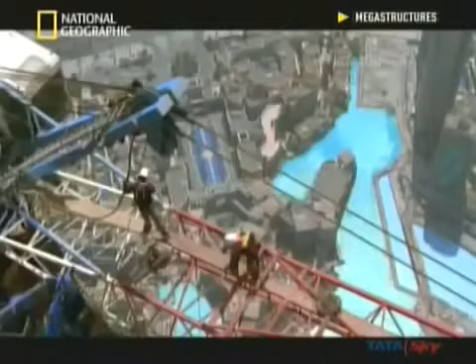The Burj Khalifa in Dubai is the tallest man-made feature on the face of the planet, and one of the greatest achievements in engineering history. To dream it up took outrageous ambition. To put it together requires nerves of steel.

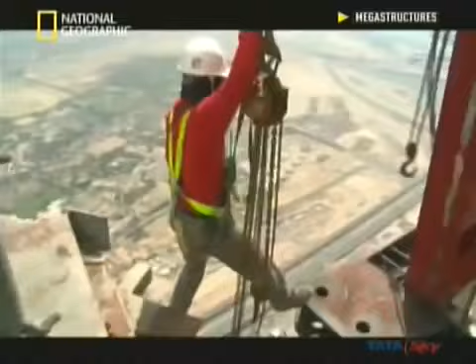Constructing cranes taller. Installing windows higher. Up! And building bigger than ever before. The immediate reaction was, "Are you crazy?" As the construction team makes history, they film it themselves. This is the story of one incredible skyscraper, and the people risking their reputations and their lives to build it. All these people that are underneath this are at risk.

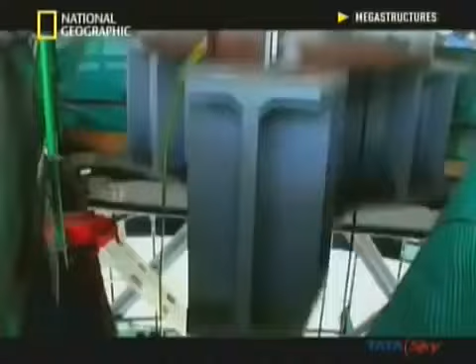In the Middle Eastern Emirate of Dubai stands an architectural giant. At 828 meters high, the Burj Khalifa is the tallest building on Earth. This $1.5 billion tower opened in 2010 with one of the most spectacular fireworks displays ever seen. But this patch of land once looked very different. 6 years earlier, when construction started, it was little more than a barren, parched, and sun-baked desert.

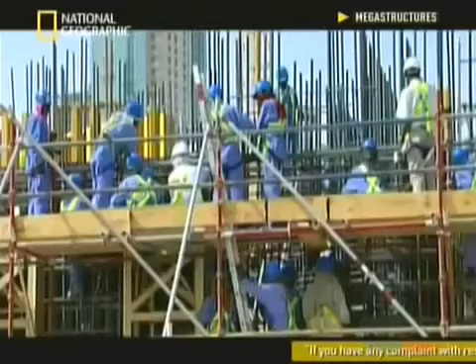In February 2004, the team breaks ground at the Burj site. When you build this big, speed is of the essence. Time is money. There's so much money invested in these buildings, you have to finish them and start recouping your investment. Construction manager David Bradford is the man responsible for getting the job done on time.

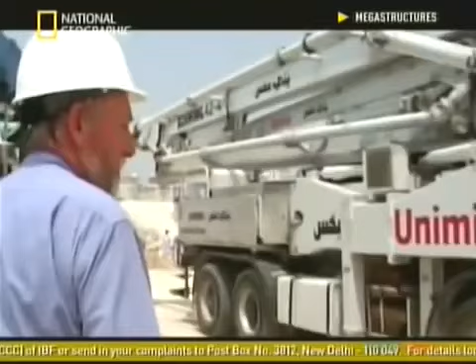So I was ecstatic, just to get a job like this. It's like a dream come true. This is the biggest building in the world. How many people get an opportunity to work on a job like this? But as David starts work, the architects are still finalizing the tower's complex design.

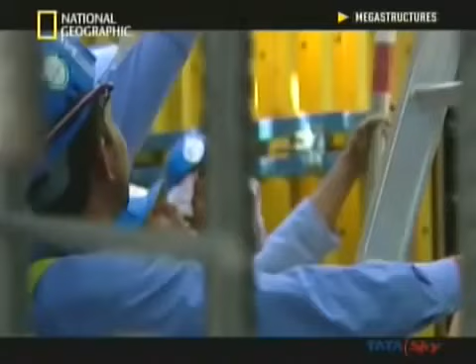The way you build a building like this, you have to fast-track it. So you can't wait until you get all the design in place. You'll be sitting there in your office for 3 years trying to get the design finished before you can tender it. With large parts of the structure still on the drawing board, the construction team heads into the sky.

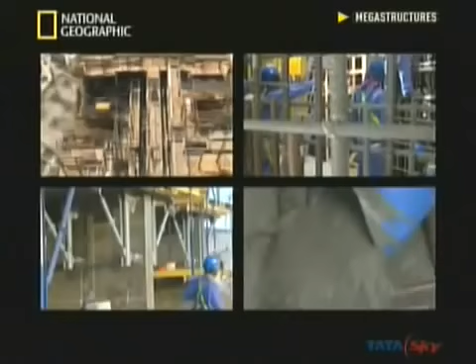The fastest way to build a tower like the Burj is with reinforced concrete, using a process called jump forming. The team builds molds at the base. They insert steel reinforcement bars and pour in concrete. Then when the concrete sets, the team lifts the molds up to the next level. And the process starts again. Using this system, the building begins growing at the pace of one new floor every week.

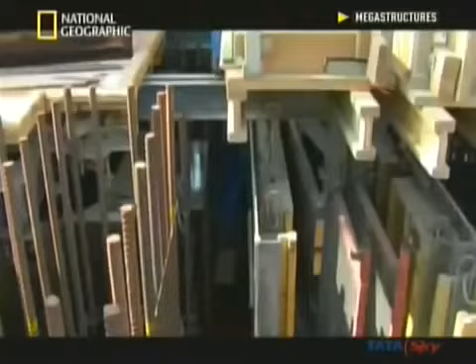When you set the jump form up like this, you put the rebar in, you pour the concrete in the top. 12 hours after you place the concrete, which is liquid, you pull the forms back and you actually climb the hydraulic jump form system up on the concrete that was previously poured. And then that climbs up automatically 4 meters at a time.

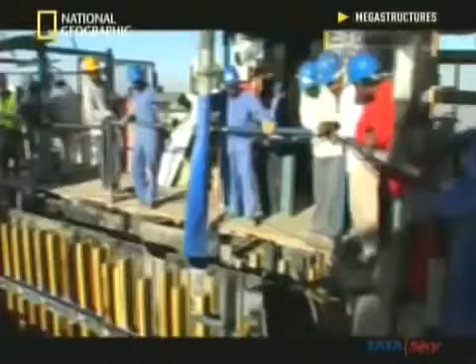The Burj Khalifa is the brainchild of Dubai property developer Emaar. They want to proclaim the city's growing status as a global financial center by building the world's tallest tower. So Emaar has called in one of America's top architecture firms, Skidmore, Owings and Merrill. SOM is based in Chicago, the home of the skyscraper.

As their chief engineer Bill Baker knows, building higher isn't simply a case of taking an old design and adding more floors. The added height creates a unique set of engineering challenges. We're on the 90th floor of the Willis Tower, formerly known as the Sears Tower. As you look out across the Chicago skyline, you see almost a sampler of skyscraper technology. Over here is the Aon Tower, which was formerly called the Standard Oil Building, and it's a single tube.

Each time architects go taller, they must invent new structural systems. If you look, the predecessor to the Sears Tower, the John Hancock Tower, it's called a braced tube. So you can see the diagonal bracing on each of the four sides ties all those columns together so that it acts as if it's one tube acting together. One of the last great structural inventions came with the tower that Bill is standing on.

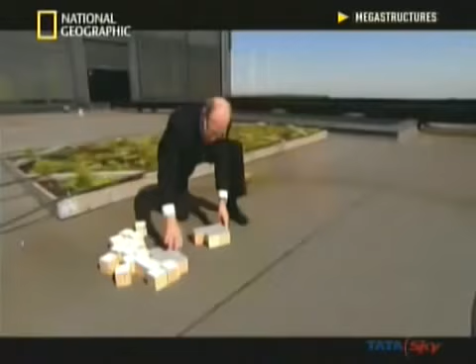At 442 meters, the Willis Tower was the world's tallest building until 1996. Its design is called a bundled tube. Essentially, it's made up of 9 towers bound together to create a single rigid structure. But this design has its limits. These 9 tubes are sufficient for a building of this height, at 442 meters, but what if you wanted to go taller? Say you wanted to go up to over 700 meters.

Well, you've got to make the footprint bigger. But as we do this, we've gone from something that was 3 wide to something that's 5 wide. So you have a huge amount of area, which is difficult to market. And what's more important is that the space becomes very, very deep. In buildings, you want to have views. You want to be able to see out the window. And you can see your occupants would be so far from the views from the skin as to render the building unusable.

To create a taller tower with bright internal spaces, Bill and his team devise a new structural system. The structural system we use for the Burj Khalifa is the buttressed core. Now the core is the center hexagon in the middle of the building, and that's what's used to resist the twisting forces on the building, okay? But it's much too slender to go to such great heights. So it needs to be buttressed.

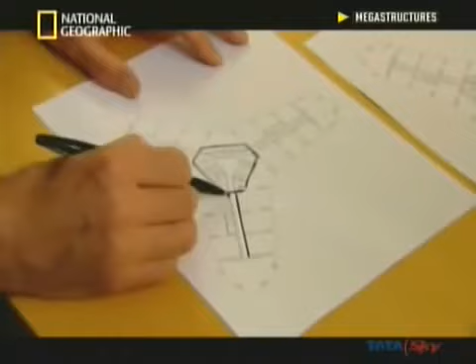Now the buttresses are the 3 wings that come off. It's consisting of these walls that go down the corridors. So you can see how this core has been buttressed in 3 directions. That's why the structure going on the wings. To my knowledge, it's never been done anywhere else. And so it's a unique solution to a very interesting problem.

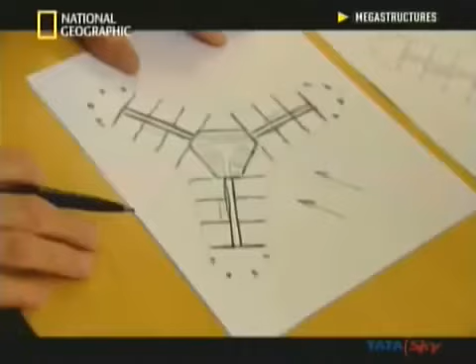With the buttressed core concept, natural light floods the interior. We've come up with a solution which allows us to go very, very tall, but it's light and airy on the inside. It's as if you're in a 10-story building rather than a 160-story building. In SOM's design, the large tower base helps support the huge weight of steel and concrete. Then, as the building climbs, the buttresses step back in a rising spiral.

The team then coats the design in glistening mirrored glass to reflect the desert heat and light. If you were to compare the Burj to an automobile, you'd be talking about Lamborghinis or Ferraris. It's all about performance, and this building is at the highest level of performance.

This quality comes at a price. The building cost was a closely guarded secret. We heard some general figures that were thrown out. We guessed that it was somewhere in the $1.5 billion range, but we weren't privy to a lot of that information. And again, I think the jury's still out. Making this billion-dollar design a reality will be a mammoth task.

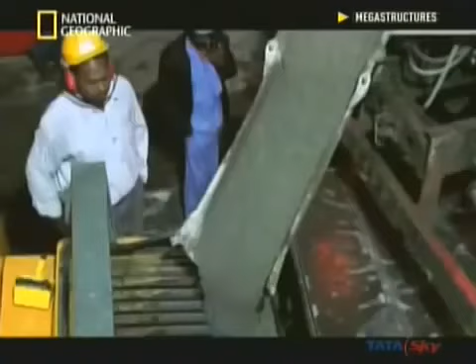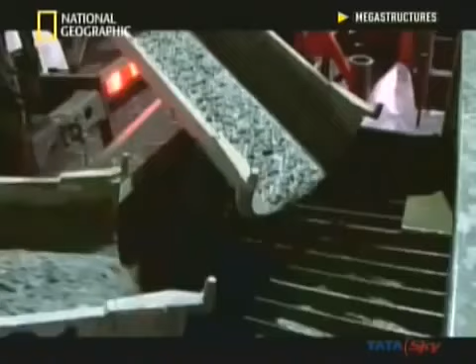The most basic construction materials must be super-powered. Strength of concrete was key here, absolutely key. And we produced concrete here that nobody produced anywhere else. The team uses over 25 separate ingredients to create concrete that stays liquid as it's pumped up the building and then turns solid extremely fast.

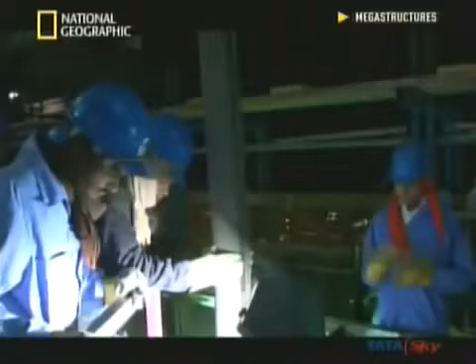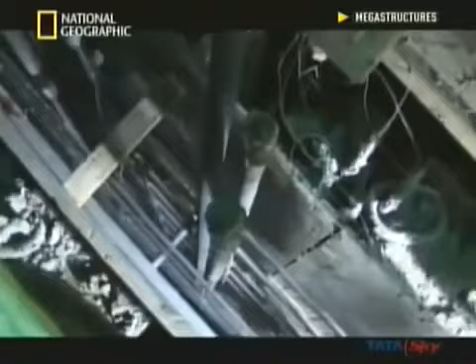But getting this special mix to set is a massive challenge in Dubai, with temperatures rising over 45 degrees Celsius. If the concrete is too hot, it'll set instantaneously and you can't even place it. You have to pour at night when the temperatures are lower, and you have to put in ice and chilled water in the concrete mix.

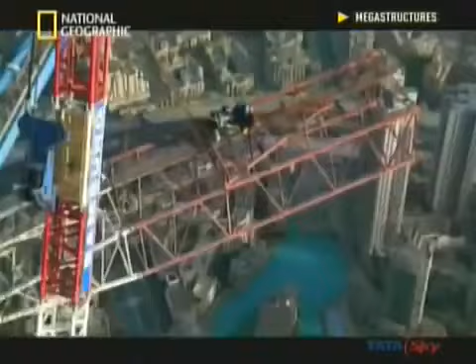To lift this mix up the building, the construction team uses 3 of the world's most powerful concrete pumps. Over 32 months, the pumps deliver 165,000 cubic meters of concrete, enough to lay a sidewalk 880 kilometers long. The team will then top the concrete tower with structural steel. And as this building rockets out of the desert, men and machinery will go to greater heights than ever seen before. Okay, over the edge.

The city of Dubai is home to 17 of the 100 highest skyscrapers on Earth. But they're about to be dwarfed by a monster. As construction accelerates, the Burj Khalifa is now growing a new floor every 3 days. The idea is keep the ball rolling, never stop construction at any point in the project until you're finished. The building's handed over, that's it. That's when you can relax.

While this process continues, there is still one fundamental detail to resolve. The architects still haven't decided on the building's final height. Usually minor things change, and this one, major things changed. The foundations went in way before we figured out the final height of this building. It's an issue that has to be cleared up, fast.

The landmark to beat is the 508-meter tall Taipei 101 in Taiwan. SOM's original design is just 10 meters higher. And one of the reasons why we did that is we didn't want to promise more than we knew we could deliver. But the architects soon calculate that the structure is so strong, it could stand over 300 meters taller.

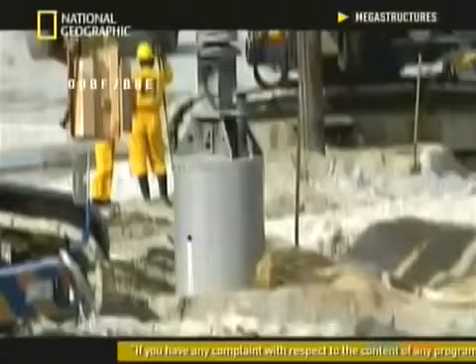When complete, the Burj will stand 828 meters above the ground. The question is, are the foundations strong enough to hold it up? Early on in construction, analysis of the ground under the site highlighted a problem. It's not like when I worked in New York City, you get good granite there, you go down 4 or 5 meters, you're into good granite, and that's what you sit your foundation on, the granite itself. Here the ground is, top layer is sand, 3 or 4 meters of sand, and you get into weak sandstones, weak limestones, nothing very good.

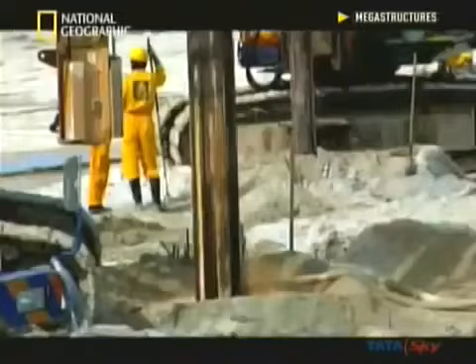But science provides the answer. The future of the Burj Khalifa and its entire colossal weight rests on one scientific principle: friction. There's basically 2 methods in piling. One is end-bearing piles, which is you put the pile directly on the hard rock. That's what can sustain the load. But here we went with skin friction piles, where the weight of the tower is carried on the friction of the pile, the side of the pile. The foundations of the Burj rely on the super strong grip created between the ground and the sides of each pile.

Beneath the tower, the team has driven 192 piles to a depth of 50 meters to support a 3.7 meter thick raft of solid concrete. These foundations must hold up a building that weighs over 500,000 tons. The numbers are so big that the team has to allow for a small degree of settling in the design. Once we evaluate all the total load of the building, live and dead loads, we expect the foundations to settle about 75 millimeters. But the foundations should hold.

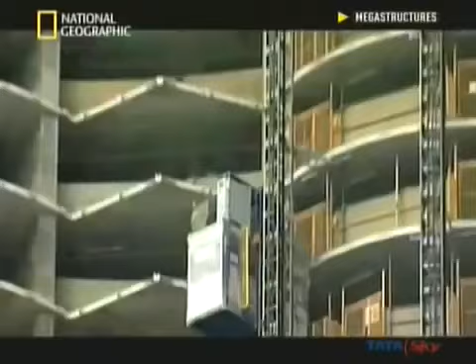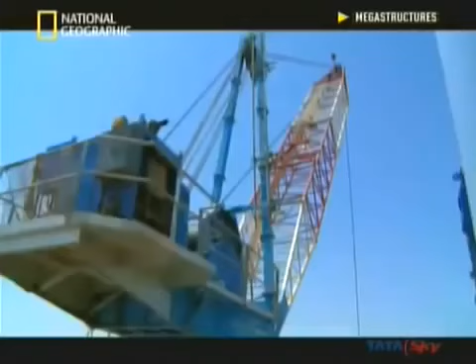3 years after breaking ground, construction reaches 512 meters and 141 floors. The Burj is now the tallest building on Earth. To help move materials, the team hires 3 of the biggest construction cranes in the world. I mean, these are very specialist cranes, actually huge. They weigh 120 tons dead weight. That's the crane itself, without anything on the hook.

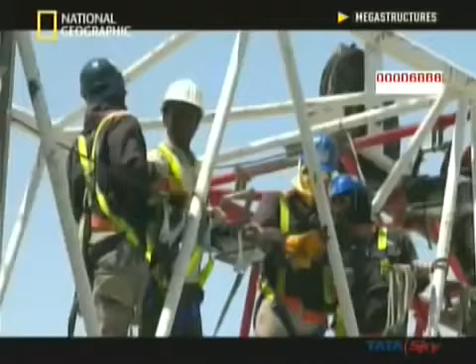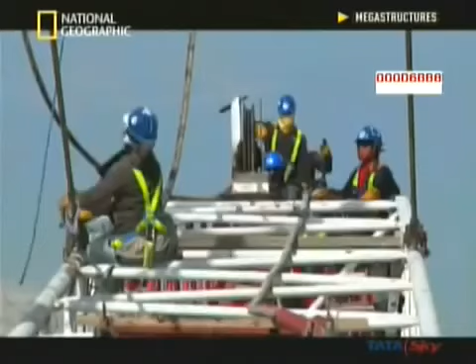The high-wire act of installing the cranes falls to a special group of men. Sharif and his team of crane riggers. These men come from every part of the globe, and many speak different languages. But they have 2 things in common: a strong nerve and an incredible head for heights. Their task is to erect the cranes and keep them working smoothly. All without a single slip. They never ever lost sight of the ground and the edge of the building, and it was amazing that these people were so comfortable.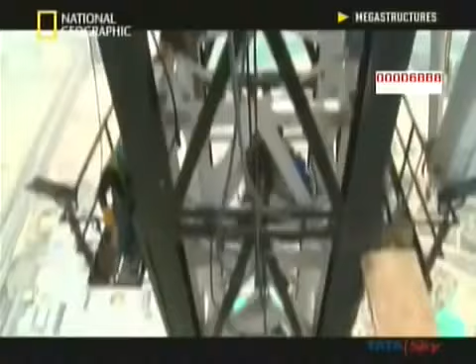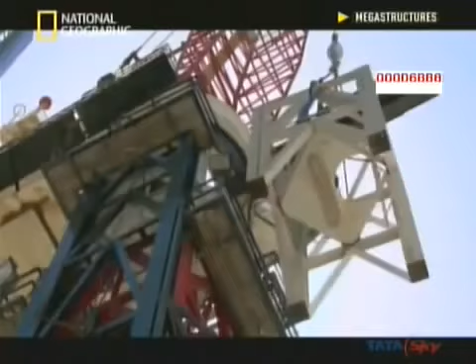The cranes contain an ingenious self-jacking mechanism, so they can grow alongside the rising building. As every new floor is completed, Sharif and his team add another section to the tower support and lift each crane even higher.

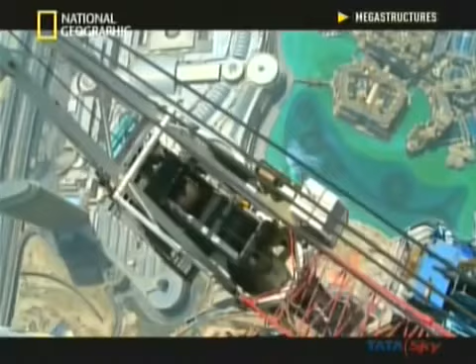You need a steady hand to operate the highest construction crane in the world. And one of the few trusted with the task is Mohammed from Pakistan. I'm on duty for 12 hours, from 7 in the morning until 7 in the evening. There was a myth going around that the crane operator lived in the cabin, but I think the cabins are too cramped and uncomfortable. At 700 meters up in the air, Mohammed's crane cab is nearly twice as high as the Empire State Building. I like heights. They're great for work. If I need to go higher, that's fine. Whatever the height is, God willing, I'll do it.

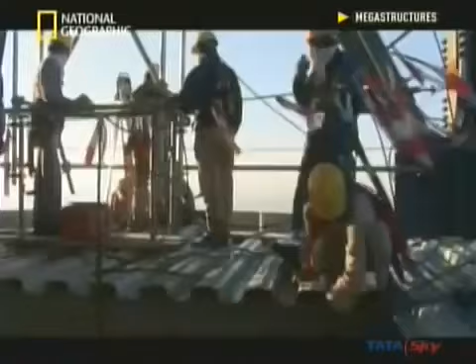As the Burj reaches for the sky, it is entering the unknown. And one powerful force is becoming an increasing threat. The first overarching thing is you have to be respectful of the laws of nature, with gravity, wind, and the sun. And on a super high rise, the most dangerous and unpredictable of these elements is wind. When you get to these heights, the dominant load is actually wind load. It's not dead load, which is the weight of the structure and the cladding and so forth. It's not live load, which is the people in the building. That's fairly small. It's actually wind load. You get the wind blowing on the side of the tower, and of course it tends to bend the tower or try to push it over.

No building demonstrates this problem better than the John Hancock Tower in Boston. A masterpiece of steel and glass, 240 meters tall, the Hancock was constructed in the 1970s. But serious problems soon emerged. Even in moderate winds, people inside suffered motion sickness as the building swayed. And over 5,000 glass panels blew out, shattering on the sidewalk below. Only a major redesign saved the tower from demolition.

To prevent the Burj from suffering a similar fate, the team tests the building in a wind tunnel. Peter Irwin is one of the world's top wind engineers. These are various models of different buildings that we've tested in the past. This one here shows some of the unusual shapes that architects are coming up with. That one's being built in China.

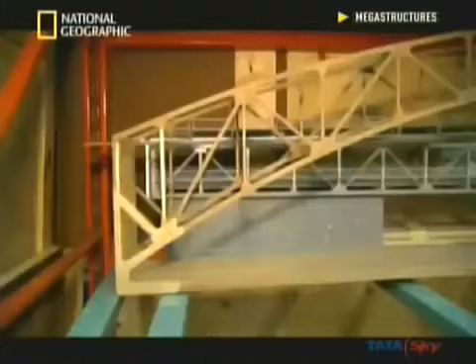When we get involved with a wind engineering project, there are 2 aspects that we need to address. First of all, we need to know what are the winds doing in the area that the building is going to be built. Then we also need to know what is it going to do to the building. Peter and the team calculate that the Burj has to withstand gusts of up to 240 kilometers per hour.

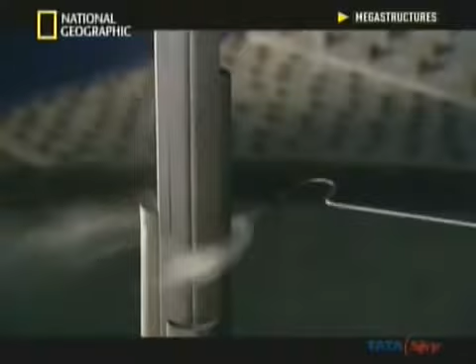But because of its height, this tower faces an added danger. Buildings, as they get taller and more slender, run into a particular phenomenon in wind called vortex shedding. This is a model of a tall building, and the wind is blowing this way. And what happens with a building like this is that you get vortices peeling off this front corner, first off one side and then off the other side. As these whirlwinds peel off each side of a skyscraper, they can pull the building violently from side to side. Peter and the team must make sure that this phenomenon doesn't damage the Burj.

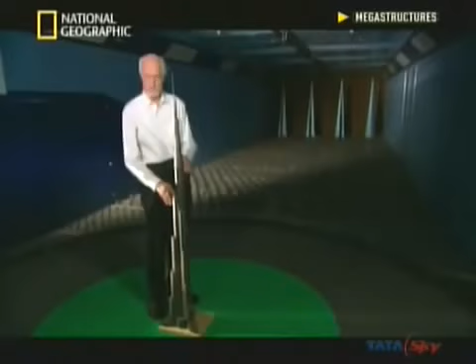There were 3 aerodynamic improvements that were developed as a result of the wind tunnel test. One of them was to improve the shape of these outer buttresses by softening the corner here. Another one was to reduce the width of the tower higher up. And a third improvement was achieved by reorienting the entire tower relative to the prevailing wind directions.

The end result is an incredibly stable building, with a shape that resists vortex shedding. So you might say that this shape confuses the wind and it's unable to create these strong crosswind forces that affect many other buildings. The Burj is equipped to handle the strongest winds that strike Dubai. On site, the superstructure is shooting upwards.

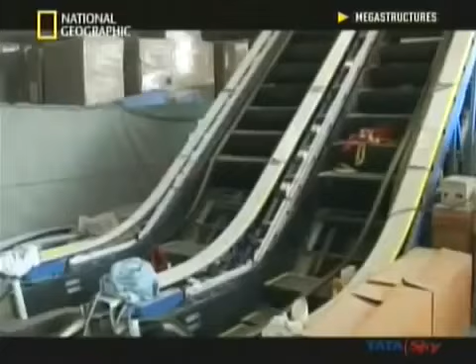Once completed, the Burj Khalifa will contain 900 apartments, a 160-room hotel, and 37 floors of offices. The building will use up to 36 megawatts of electricity, enough to power a town of 20,000 people. In a power outage, 5 huge generators will supply backup electricity. But first, someone has to get these massive machines into position.

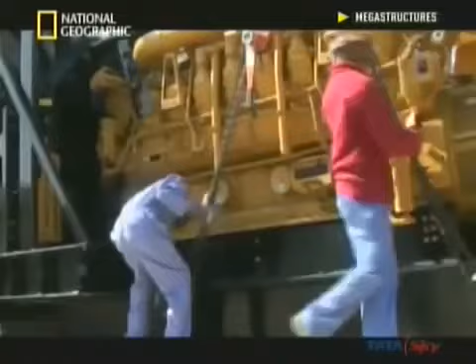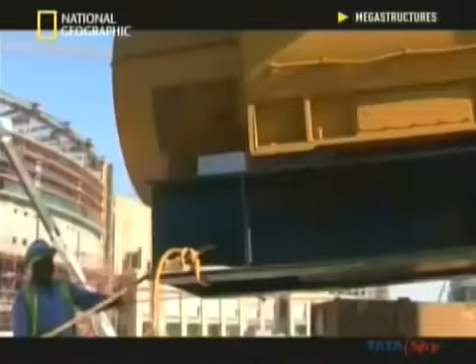3 days before Christmas Day, and look what Santa's brought me. That's a 22-ton generator, and there's 5 of them. Pull it. Gently. Keep your eyes on the machine. What have we got? 26. It's supposed to be 22. Someone, somewhere, has made a critical mistake. Each generator should weigh 22 tons. Why is it 26 tons?

You're amazing. Amazing. Everything is rated below 25 tons. The spreader beam is rated until 25 tons. All these slings, they're 6 tons each, that's 24 tons, and we're trying to lift 26 tons. Therefore, all these people that are underneath this are at risk. Right now, my people are at risk. It's 26 tons. The generator is 4 tons too heavy, and the chains could snap at any moment.

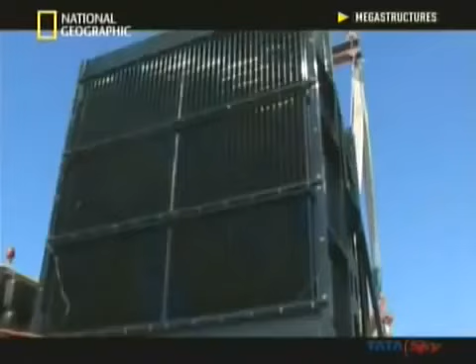Put it down. These things are not an exact science. It's experience, and I'd sooner not risk the lives of men or machines. When you're building on this scale, safety is paramount. The team must reinforce the lifting gear before moving the generators into the building. You go downside, huh?

As work progresses, the task of keeping everything on schedule is taking its toll on David Bradford. I went all out here to produce the best job possible. That had an impact, obviously, on my family life. My wife didn't see me, although she didn't complain about it, but I'd show up home and my wife had already gone to bed, and I'd be out in the morning before she got up. But the job's just about to get even tougher.

It's kind of a building you can't afford to make mistakes. Okay. That's the bottom line. You make a mistake, the building stops, then everybody incurs huge costs. The contractor's got all his plant and equipment lying idle. He's got thousands of workmen out of work, basically. Can't afford mistakes. You have to check, double check. Everything has to be more or less perfect, all the way up the building.

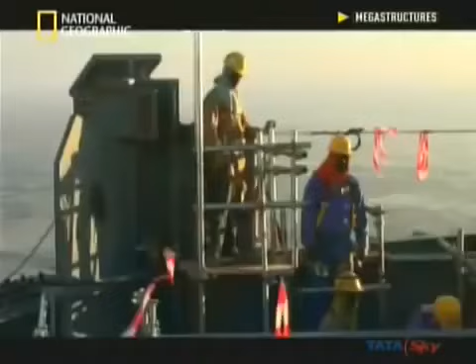And with the superstructure almost done, one thing is less than perfect. The glass panels that should already cover most of the building are still nowhere in sight.

As the finished shape of the Burj Khalifa begins to emerge from Dubai's desert haze, the team urgently needs to start cladding the building in its steel and glass facade. As the construction drives upward, you need the cladding to enclose the building, create an interior environment where you can actually work inside and do fit out and mechanical work. All the kinds of things that make the building habitable need an enclosure. It is a massive task to seal the structure from wind, rain and sand.

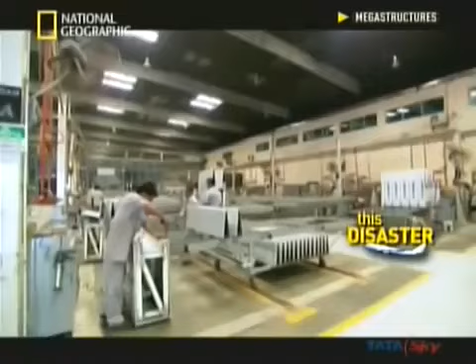24,348 individual panels must be assembled and installed on the exterior. But the company commissioned to supply the panels has gone bust. Now the building is in danger of going over schedule and over budget. Every idle day, every decision that is not made, costs somebody a lot of money. Local contractor Arabian Aluminium brings a new panel supplier on board. And they track down a problem solver to kick-start the operation.

I hopped on a plane, arrived in Dubai for the interview and was taken to the job site. And he said, well, this is the job and this is what you're going to be doing. And I looked up and I said, wow. He goes, yeah, it's not even halfway there. So big surprise. And I said, well, where's the windows? He said, well, this is a problem. There is no curtain walling. There's no design. We don't have a system. I said, well, this is a job for me then. I can fix this problem.

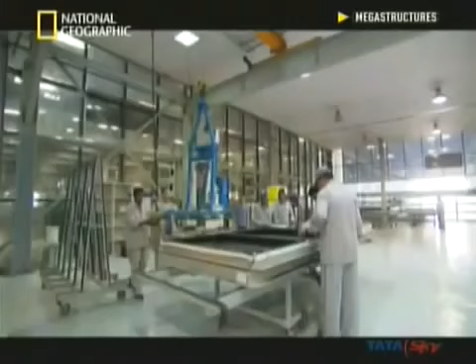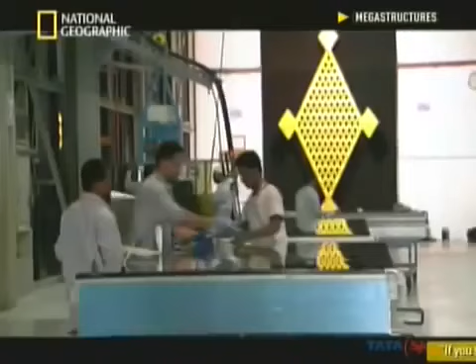Construction of the facade is now 18 months behind schedule. To put the build back on track, John Zarafa helped set up a brand new factory devoted entirely to the Burj. I thought, yeah, it's going to be difficult, but it's a challenge. We were fairly amazed because they went from appointment of their new contract through design, through production of the components and ready for the testing in a space of 4 months.

This is a typical panel that was used on the Burj, basically with a vision glass, big piece of vision, small vision glass, stainless steel spandrel, vertical bullnose. It's a stainless steel fin, it's mirror finish, which at the moment has got protection on it, which will eventually get taken off. These panels are literally lifted up as a complete unit and they're hung. That's why they call it a curtain wall. It's actually hanging from the slab above.

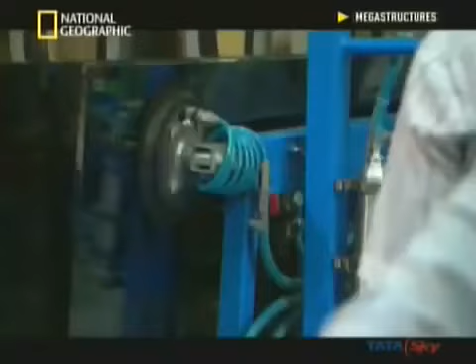Covering buildings in glass might look good, but in Dubai, this creates a special challenge, as John demonstrates. We've got a piece of clear glass here, just normal glass. The sensors are measuring the temperature in the box to understand how much heat is transferring through the glass and into the box. So if this was on the building, this is the amount of heat that would transfer through the glass and into the building. The outside temperature is now reading 46 degrees Celsius, which is very, very hot. As you can see, we're having a bit of a sweat.

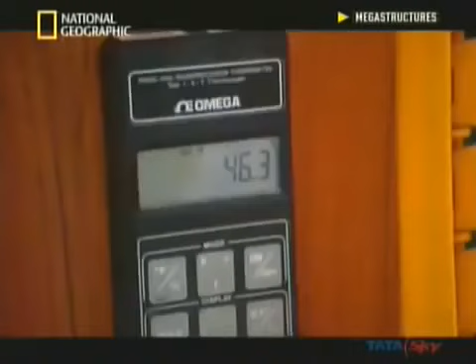46 degrees Celsius is high, but that's nothing compared to the temperature under the glass. The current temperature inside the clear glass box is reading 98 degrees Celsius, so not too many human beings that I know could actually live in this environment. The internal temperature is just below boiling point. If this ordinary glass were installed in the Burj, the building's interior could become the world's biggest sauna. But the team has a high-tech solution.

Here we've got the glass for the Burj Khalifa, which has 2 coatings on it. The outside coating is a silver coating, which captures the UV rays and reflects them back out of the building. The inside coating is a titanium coating, which captures the infrared rays. By reflecting infrared and UV rays, the glass drastically reduces the amount of heat that penetrates the building.

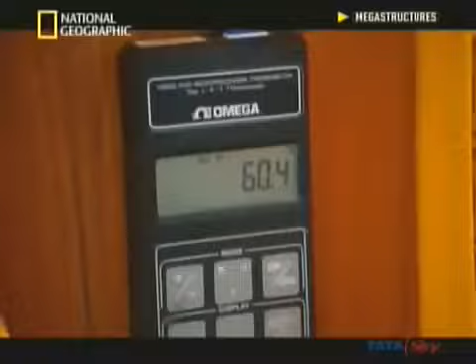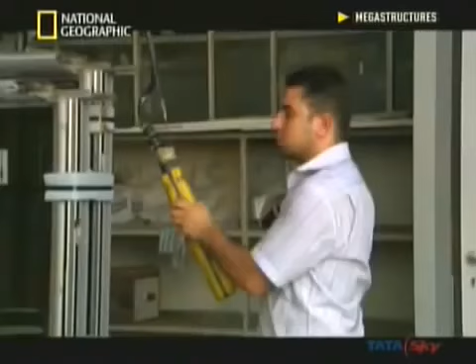But this technology comes at a cost. With everything that is involved with making a panel, to the point of bringing it to the site and installing it, you're probably talking close to $2,000 US a panel, times 24,000 panels, it's a lot of money. So 24,000 times 2,000 is 48 million. As the glass and aluminium arrive in Dubai, factory workers assemble the panels and ship them straight to the building site.

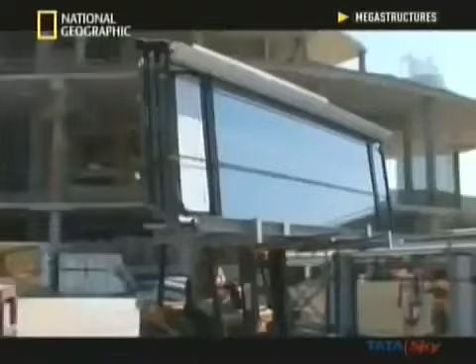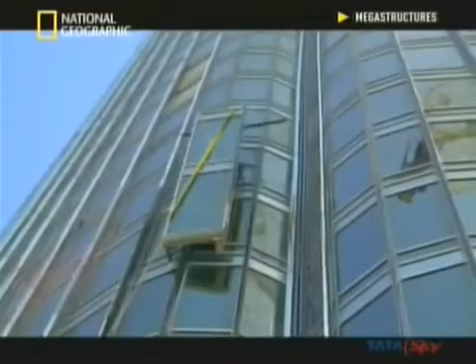The panels are up to 6.4 meters long and weigh up to 750 kilograms. And every single one must be lifted individually and installed by hand. It's very dangerous. You can imagine these panels are quite large, and as soon as the wind grabs them, they're like a big sail, so very difficult to control. The panel could go flying back into the building, the glass would break, and you're going to get a shower of glass coming down the building. A guy could get his legs cut open and stuff like that. It's quite dangerous.

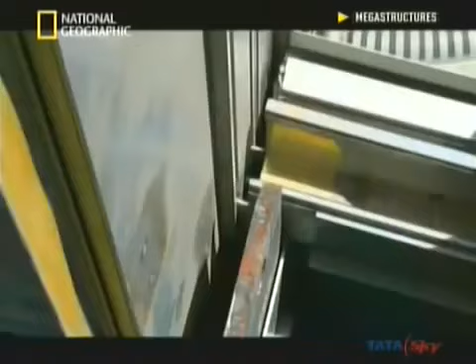As the workmen seal the building, no one is following progress closer than construction manager David Bradford. The major milestone, believe me, I've been working on this thing for a year now. It's been a nightmare. On a Friday, if I wasn't coming into work, I'd set my telescope up on the roof and spy on the cladding contractor and make sure he was working. If he wasn't, I'd give him a telephone call. Yeah, hey, what happened? You know, why aren't you working?

We actually recovered all the time that we needed to get the building back on track, which was really astounding that they were able to do this. The curtain wall is virtually finished. 5 years after breaking ground, the Burj is racing towards completion.

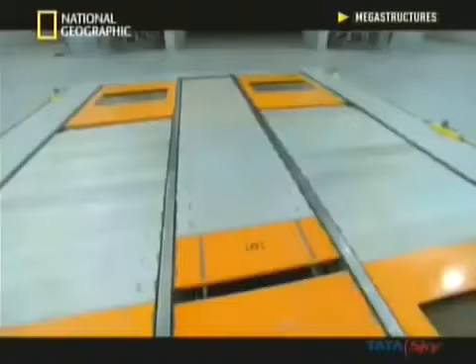On the outside of the building, one of its signature features is taking shape. The highest external balconies in the world. It was a client suggestion, and my first thought was, you better bolt down the furniture. We'll head into the main control room. Wind engineer Peter Irwin has a simple way of demonstrating the problem. Using a state-of-the-art wind tunnel at the University of Western Ontario, run by engineer John Comar.

The air is streaming through this side. It contracts right through this nozzle in a very uniform fashion and streams right into that corner number 1. Okay. What we want to do today is to look at the effect of wind on people. We will presumably be able to have them harnessed down to be safe. We'll certainly strap them down and get them linked to the floor so they don't blow away.

In Dubai, the Burj Khalifa might be hit by winds gusting up to 240 kilometers per hour. And this demonstration will show the effect of high winds if an ordinary person was standing on an unprotected balcony. Okay, we're turning on the wind, Simon. It's going to go up to 70 miles an hour, so get ready. Okay. In case you run into trouble.

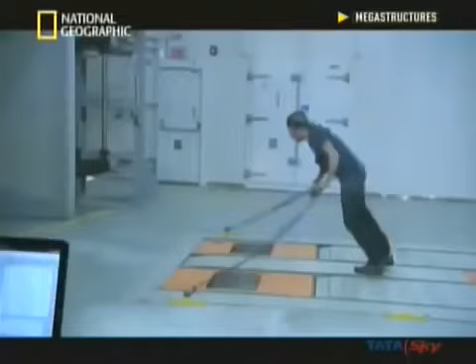130 kilometers per hour is equivalent to a Category 1 hurricane. Could you try and take 1 or 2 steps forward? Okay, thank you. That's enough. What would it be like to be on a balcony in that kind of wind at 120 stories? To prevent people being blown off the Burj Khalifa, the architects developed ways to protect balcony users from the wind.

We came up with these glazed balustrades which keep the wind from blowing straight through across the balcony terraces. We came up with these architectural dividers which keep the wind from coming over the balustrades and sweeping across the surface of the terraces. And we created these trellises which stop the downdrafts from pushing down over the tops of each terrace. But inside is the most ingenious solution.

Well, we have wind alarms installed on every facade where there's a terrace. So if the wind speed on the terrace exceeds what we consider to be safe for the occupants, there will be an alarm that goes off to warn people not to use the terrace at that particular moment.

Meanwhile, further up, the building has yet to reach its final height. The construction team must crown the structure with one of the most extraordinary pieces of engineering ever attempted. A 136-meter tall steel pipe, weighing over 350 tons and measuring just 1.2 meters across at the very top.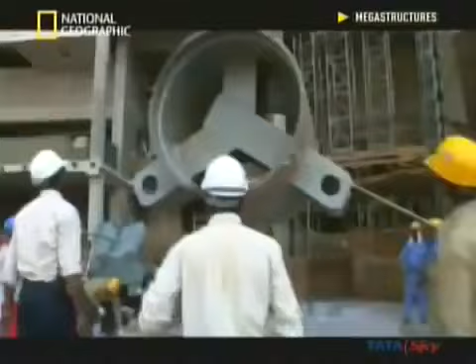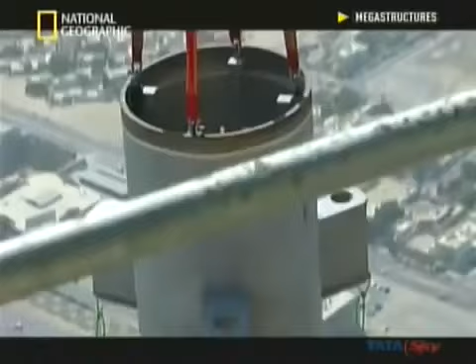The thing is that we couldn't get the crane high enough up to set the spire. Even with the crane at maximum boom height, it couldn't get anywhere near the top of the spire. No crane in the world can handle this job, and no helicopter can lift 350 tons of steel. It seems the spire is too big, and its destination too high. But then, an engineer suggests an ingenious solution. Lift the spire in pieces and assemble it inside the building.

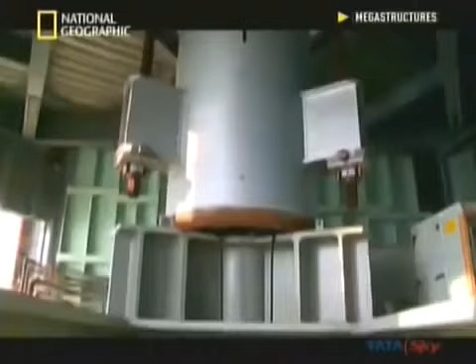The spire was basically constructed inside the shaft of the building, and then using strand jacks, it was then jacked out of the building. All the lead architects and engineers gather to see the spire rise into its final position. Here we are for the last jacking of the spire to take it up to the top.

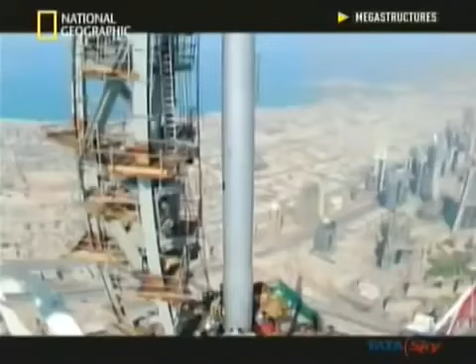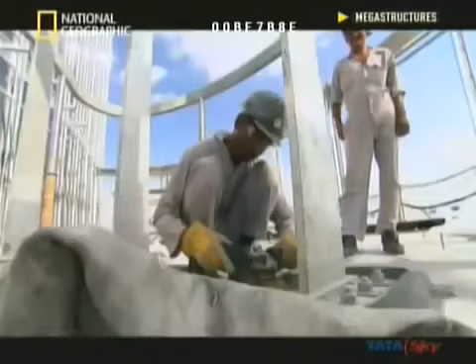It's a pretty nice moment to see this happen. For the first time, the silhouette of the Burj is complete. The team can now start to apply the finishing touches. This building doesn't just have to be the tallest in the world, it also has to be the best. And to make sure it's just that, some brave men are about to go to extraordinary heights.

It's a long way down here. Yes, sir. Long, long way down.

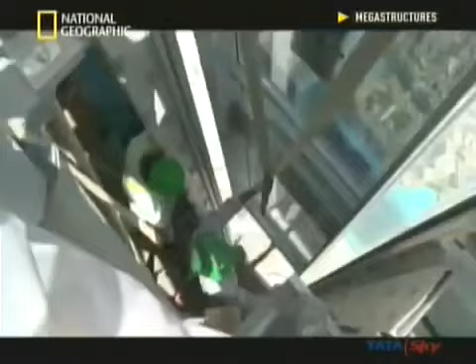After an incredible team effort, workers are finally installing the last curtain wall panel on the Burj Khalifa. The key to the job was the planning. We planned that whole thing down to the millimeter, down to the second.

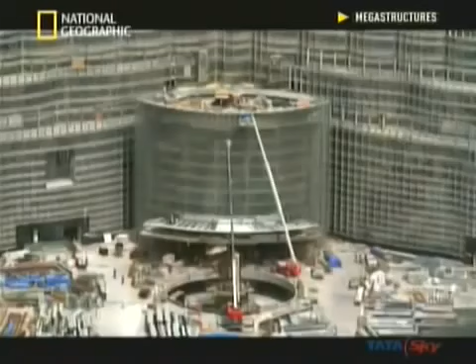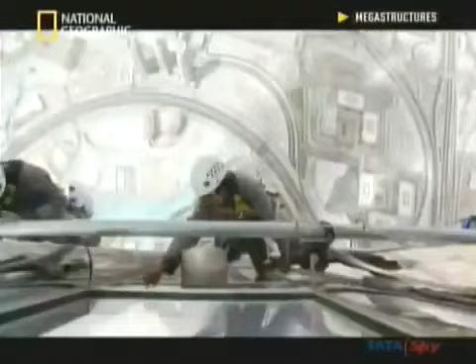The race is now on to finish the building before it opens in 3 months. After 6 years of construction, it's covered in dirt and dust. But there's a simple solution. Teams of window cleaners will polish the entire facade by hand and rope. All 24,348 panels.

800 meters up, there's one more job. After dark, the entire building will be illuminated by thousands of decorative lights. But at the tip of the spire, the last 7 lights still need to be installed. The scope of work was to cut 7 holes into the existing spire.

If it was me, I probably would have said, out of 2,000 lights, 7, forget about it. Standing on the ground, you're not going to notice. But Emaar wanted to do this job 100%. You know, they set their targets very high. The construction team must find a way to finish the job. You couldn't get a scaffold up there. The crane couldn't get that high.

Rope access expert Mick Flaherty has the answer. The immediate reaction was, are you crazy? How do you intend on doing this by hanging on a rope? Mick recruits a highly trained supervisor to lead the job. Now this is an abseiler. This is a guy that's worked in the rope access industry for many years.

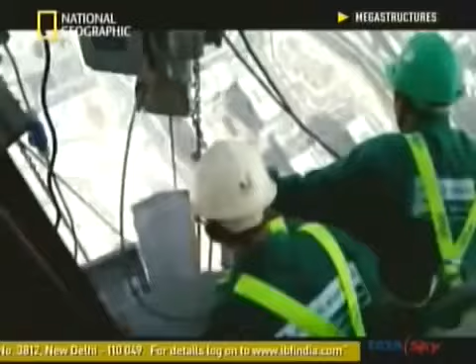But just before they're due to start, disaster strikes. At this height, it does something to you. You're totally out of your limits. Making our way into the spire, I could see it in his eyes. He was concerned. He went white. He stops and he says, I'm sorry. I says, what's wrong? He says, I don't want to put my own life at risk. I can't do this job.

With no time left to find a replacement, there's only one solution. Mick has to lead the job himself. It's a highly dangerous task, in some of the toughest conditions imaginable. For me, it was the heat. It was the environment here in Dubai. It was a heavy construction job in an extreme environment. It's too dangerous and inaccessible for a TV crew. But Mick films it himself.

He's going to get into position now. Then, Mick has to seal the lights in place from the outside. We got to the top of the spire and I rigged the job up and threw the rope, looking to make sure I had knots on the end of them. This one's a serious one. Yeah. Okay? Very serious. You're all ready now? All ready, sir. Okay, over the edge. It's a long way down here. Yes, sir. A long, long way down.

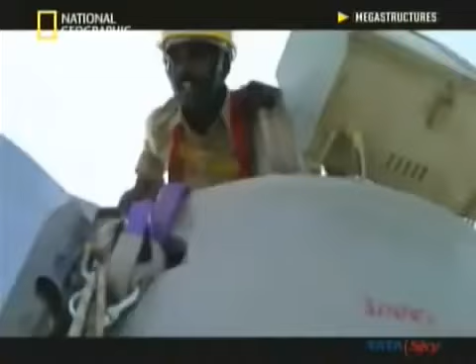You feel so high, you know? It doesn't feel real. Okay, Jamil? Yes, sir. All okay, sir. All right. Keep it there. That initial going over the side and doing the abseil, it was just a mega buzz. It was like, shall I look down or not? We've been cutting the hole with the steel. We've then been installing the light housing. And now we're going to finish by sealing. Automatic, yeah? Yes, sir. So that is the job complete.

These guys, they have bodies of steel. Isn't that right, guys? Yeah. See? This is what it's all about. Appreciating your job.

The Burj Khalifa finally opens to the world in January 2010. Standing 828 meters high, it is the world's tallest tower by over 300 meters. Creating it took the combined effort of tens of thousands of people. From the hardest workers and the toughest bosses to some of the brightest minds in the architectural world.